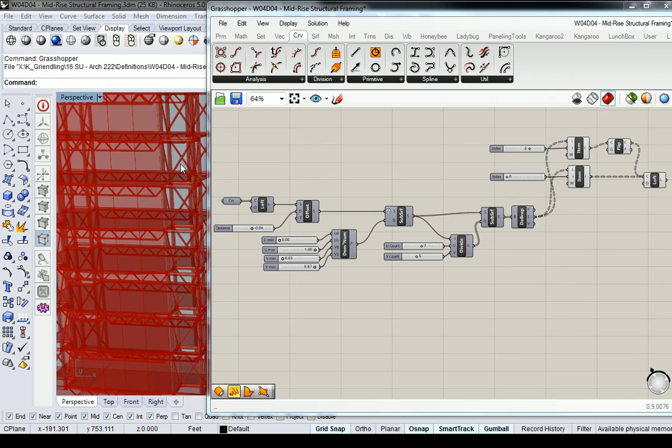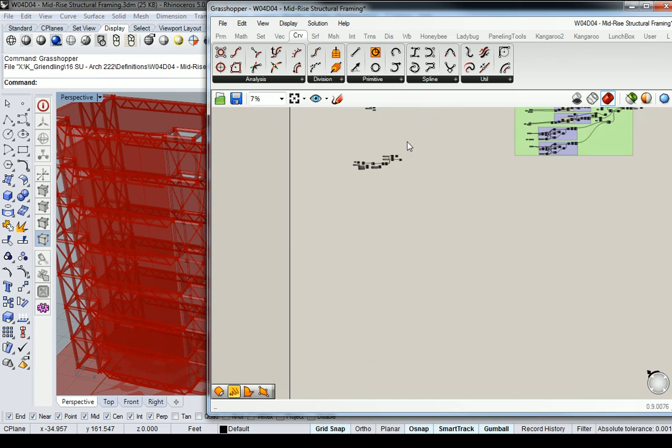So what I have here is a list of 35 lofted panels, and they're probably in a particular order. I'll worry about that later when it becomes necessary, but ultimately a smart thing to do would be to just turn off a lot of the excess information we have here. So some of our structural elements, I'm going to turn off. These items over here, I can turn all this stuff off to make it sort of simplified. So let's look at it in this way for now.

Now, the easy way to construct this, in my opinion—you may have other ways of doing this—but I think it would be very easy to reparametrize a square into the top, left or right corner. See what we've got there? The black things are basically structural armatures.

So if I can reparametrize a square profile into that corner, I can extrude it as an armature. And then I can grab one of the points on that armature and use that to extrude back to the panel corners, which is different from probably the way some of you guys have approached it. So I'd like you to pay attention to this one rather closely—it's a good alternative.

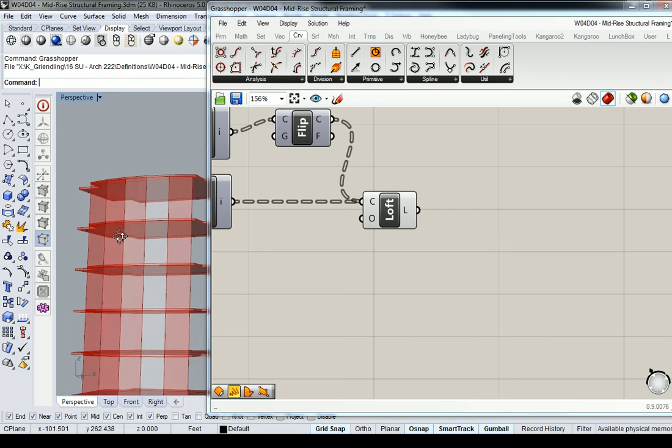So right off the bat, I'm going to reparametrize this surface, which means I need to borrow this information back here. It's just a good way for me to be pretty efficient. So, loft into there.

You're going to find that the loft is—looks like not only did it change directions, but it's not going to be correct here. So I'm going to bring my V minimum up toward the top of my panel.

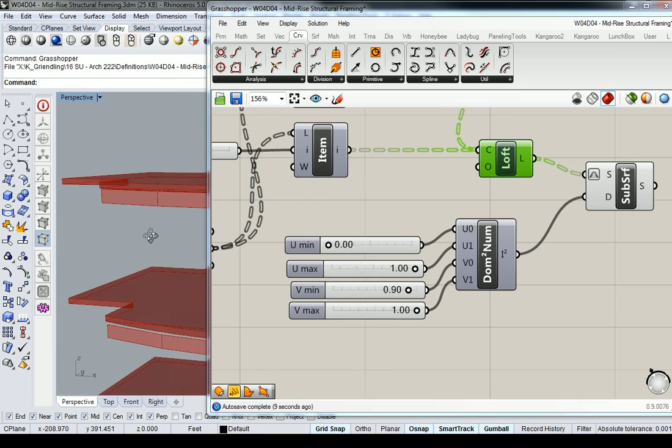Actually, I'm going to leave my original loft on. So I'm going to bring it up toward the top of my panel. 10% is fine. And then I'm going to reduce the maximum down to about—you can make it square, it doesn't have to be square. Something kind of like that.

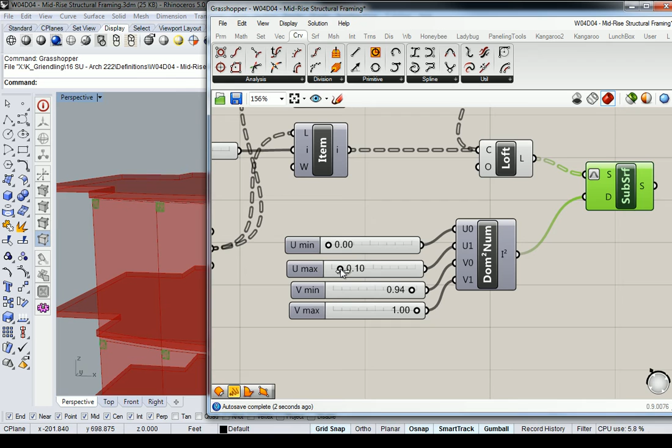Now it doesn't have to be perfect. This is kind of just a massing sort of exercise.

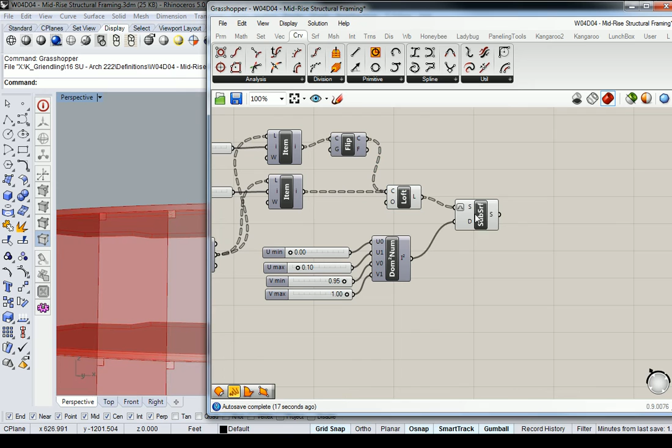Now, because these are reparametrized, they already have an orientation that's aligned to the panels themselves. So I could either pull my normals off of these surfaces, or I could pull my normals off of this surface. And if you still have your user-generated surface normal tool, you can use that—basically like this, it just finds your surface normal directly off of it. Or you can do it off of the loft and do it manually. But for argument's sake, since not all of you saved your surface normal tool, I'm going to do it here.

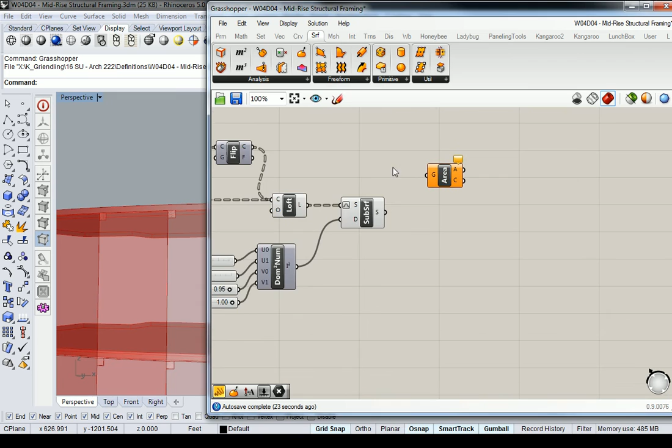And again, the surface analysis tools you need—there are three of them, from Surface Analysis: Area, Surface Closest Point, and Evaluate Surface.

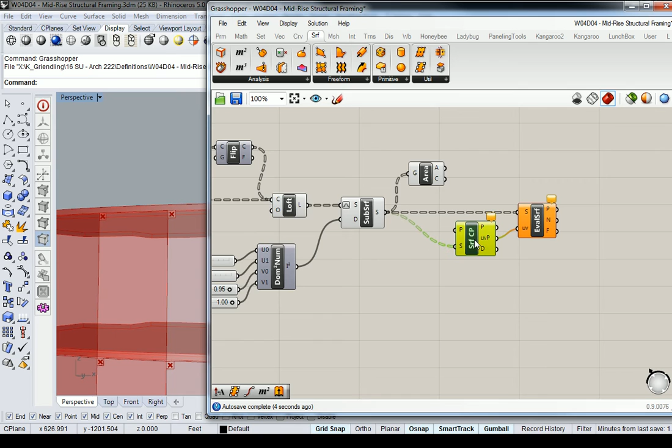So the surface is going to plug into Area. The surface is also going to plug into the surface input of Closest Point and the surface input of Evaluate Surface. But the UVP is going to be the connection into UV, and then the surface closest point is going to borrow the centroid as its point of reference right there. Okay, so these three, they're kind of the golden trio of finding a surface normal.

And this is what you're going to see here: the panels are all located on each of the elements that we just crafted. And so we're going to have to extrude those elements.

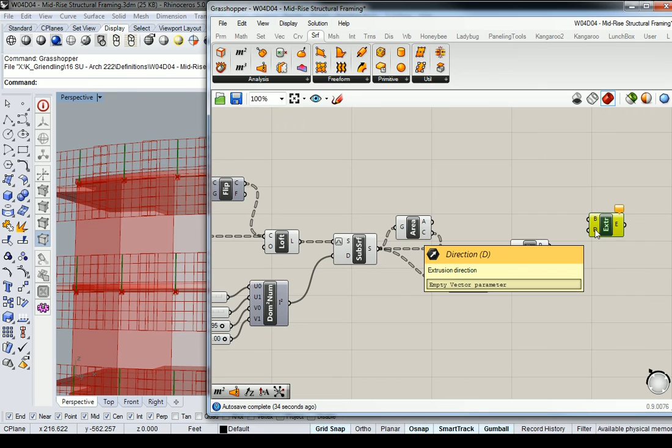So I'll go to Surface Freeform Extrude. We're going to need the direction and magnitude, so I'm going to use Amplify under Vector, Vector Amplitude. And the vector, of course, is going to be the normal—that's this right here. The amplitude we're going to generate, but the geometry that we're going to extrude is this right here, our reparametrized surface.

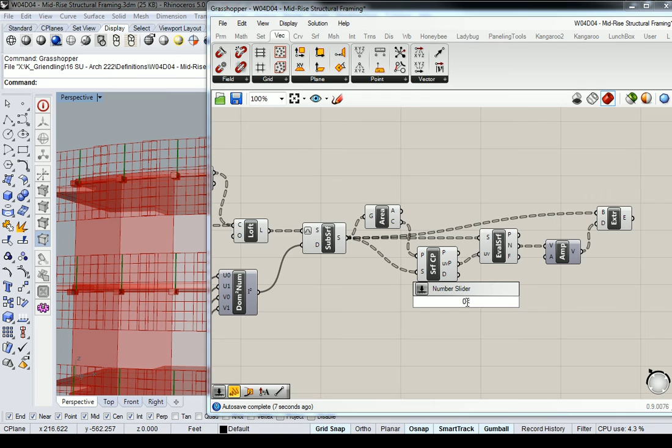So let me drop a slider in here that says 0 to, I don't know, 5 feet—5.00.

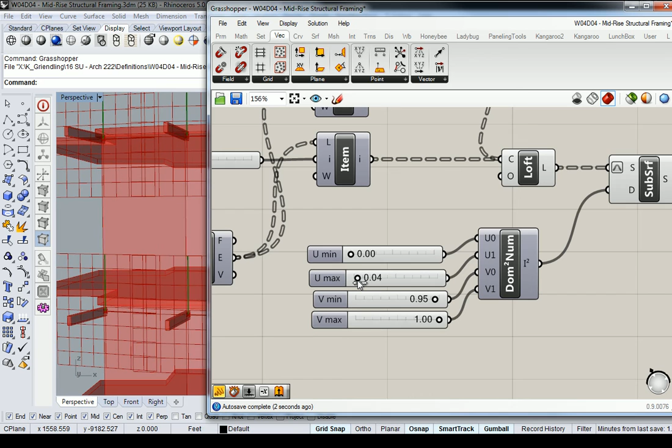All right, so this is going to be essentially the first step in generating this, but it's not the last. I'll do it sort of like that. It's definitely not the last.

So I mentioned that the length needs to actually be built off of an attractor point, right? That's kind of the next level of specifics that you need built into this.

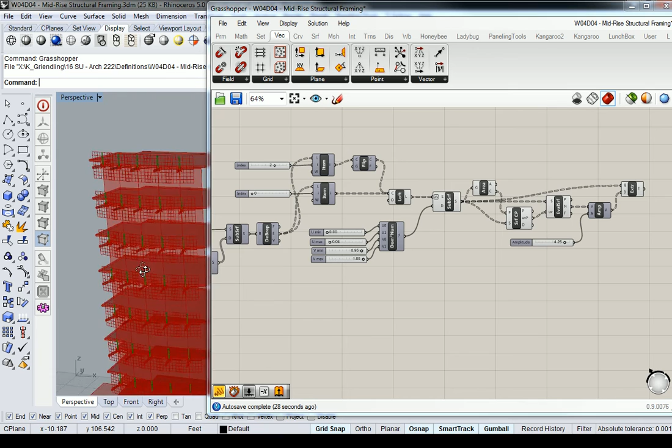So the attractor point, well, let's first create a point to be our attractor point. Let me drop it down here off of the surface a little bit, and then I'm going to rise it up. Let me just pull it up in the middle.

Adam, I think this was the part that was confusing you, right? So that's going to essentially be kind of like my sun position, more or less. Not exactly the sun position, but it's more of like a, anyway, doesn't matter. We'll talk about that sun stuff later.

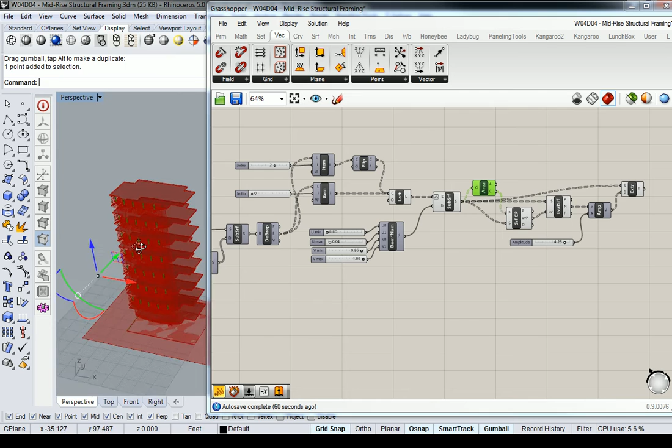But so basically, we're going to measure the distance of each of the centroids in this particular exercise, so that would be their base points, from this attractor point, and then we're going to use that as a modifier for the extrusion amount that there is for each of these items.

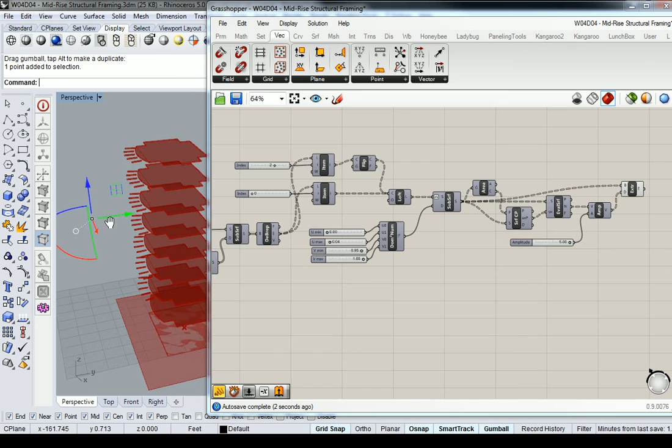Turn these off, let's turn those off, let's just look at these. And I'm going to actually just exaggerate these to 5 feet for all of them for now. Okay, so the actual attractor point function looks like this.

We need to go up to point under vector. We're going to go to point, and we're going to use closest point, the singular one. So this is going to measure each and every individual point, its distance from the attractor point.

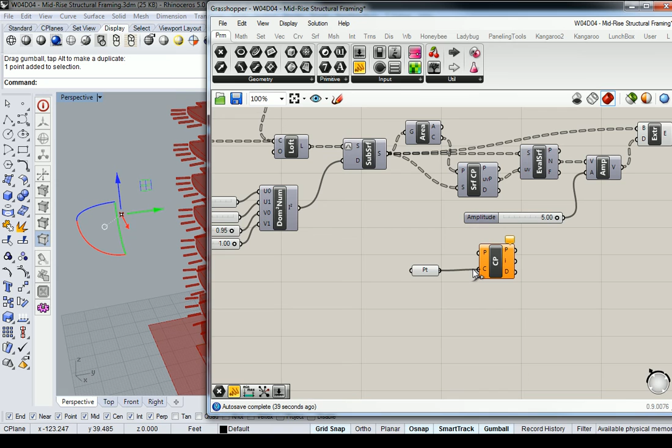So the attractor point will be referenced in, and that's going to be our cloud of points. I know it's a little confusing because this is the multiple, but in the singular version we're plugging in. That's the singular, yeah.

This is the cloud as a list for cloud of points, plural. But then this one is the singular input of point, so it's a little backwards. But anyway, that's going to be your list of centroids, so that's these right here.

And what it gives you is a numerical list of distances. So we can see this here, like this. And in fact, this particular list should be flattened.

Okay, so because I'm flattening this list, it means I want all of the elements in this exercise to read as a flattened list as well, wherever possible.

So I'm going to go all the way back to the source, which are these, and I'm going to flatten all of them. You see that this entire section becomes flattened. That won't always be the case, but in this case, I want them to be flattened.

And that's because I need to take this list of numbers and I need to remap them. You can't remap numbers unless they're a flattened list. Well, I shouldn't say it that way. You can only remap numbers that are in a particular set of a list.

So when I change the range, it won't read each individual grafted list item only once and then be unable to remap it. Does that make sense? Okay, well, anyway, I'm going to leave that there if you need to see it.

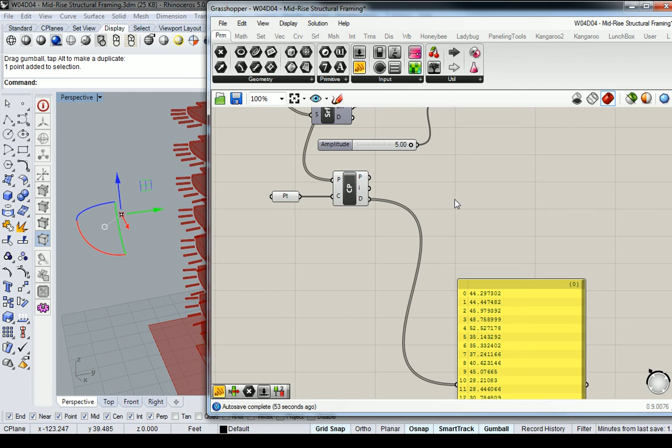So now my task is I need to take these numbers and I need to adjust it so that it reads per a particular range that I define. So that's under math, domain, and remap numbers.

So now the value to remap is going to be the list of distance values, that's these. The source domain is going to be the domain, or the minimum maximum values of the list that you plugged in. So that's found using domain and bounds. We just take those numbers, and that creates a minimum of 25 and a maximum of 52, so I'll plug that in.

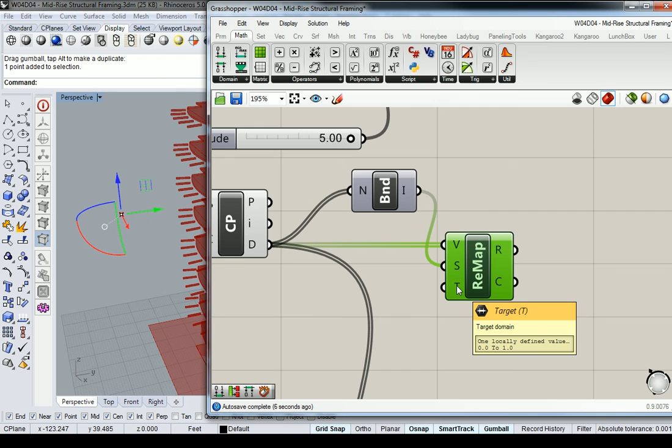And then a target domain. So this needs to be constructed as a domain, which means I need to go to domain and construct domain. And then I need to give it numerical values that are going to generate the domain minimum and maximum. So I'm going to do a minimum of 1 foot and a maximum of 5 feet.

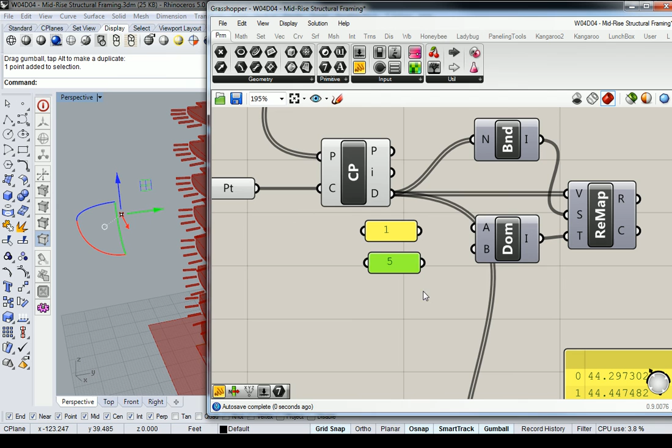So now my remapped values are the same proportions, but minimum of 1, maximum of 5.

Next step is, instead of the number slider amplitude, we have 35 values being plugged in for vectors, we have 35 values being plugged in for surfaces, and we have 35 numerical values that are going to be plugged in for our amplitude.

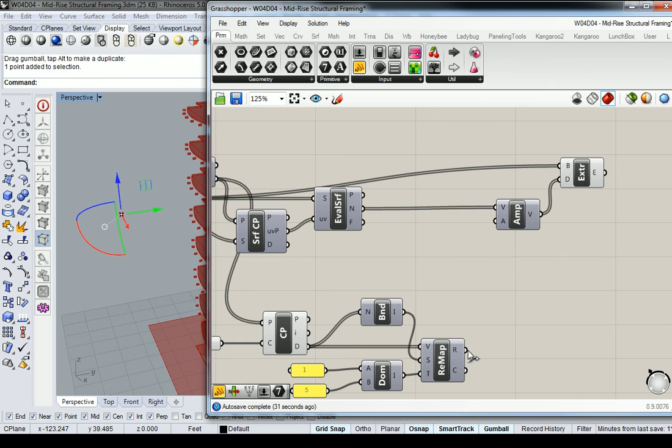And so you can see here, and I'll turn off even more stuff so it's more clear. You can see here what's happening is that the point value that's closest, go over there, is going to be the smallest, and then the point value that's farthest away is going to be the longest. Is that clear?

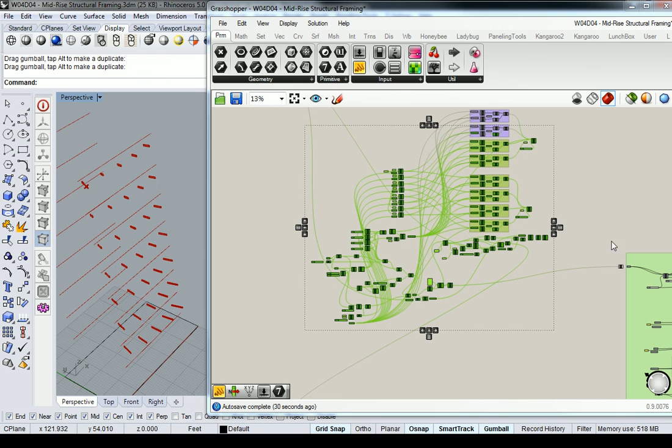Okay, so there's one more follow-up item, and I'm only at 12 minutes on this video, so I'll do it as a separate video. It'll make more sense that way.